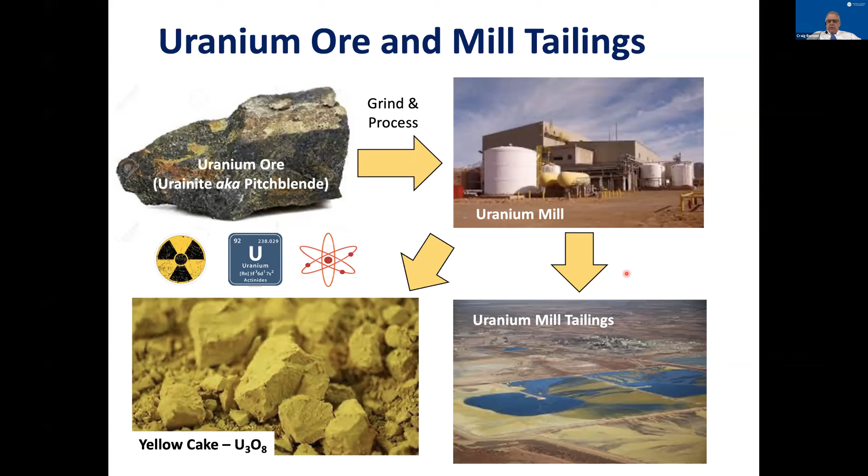So the concern about the environment at the time, particularly when uranium production was beginning in the 50s and 60s in the United States, we had essentially large disposal units for mill tailings, which were unlined and exposed to the atmosphere, uncontrolled waste disposal sites. Today, we wouldn't be doing that, but that's what we did historically. And I don't criticize anybody for that behavior during the time. We just didn't know that this was something we needed to manage more carefully.

In 1978, US Congress passed the Uranium Mill Tailings Radiation Control Act because we had discovered that we had created many of these disposal facilities which were uncontained, and they were having impacts on groundwater and on the atmosphere. So we were getting both air pollution and groundwater pollution. And UMTRCA, really a formative bill, has a whole series of requirements in it, but it required that we limit radon flux to the atmosphere. And we'll talk about what radon is, and we'll talk about what radon fluxes are.

It limits water percolation of the waste, so gas out, water in, and limits groundwater contamination. We're doing that primarily by limiting water percolation in. Importantly, we needed to design these facilities to function for at least 1,000 years, and after the first 100 years, have to function effectively with no maintenance. So that's a really challenging design goal for any engineering system, including uranium mill tailings. You can imagine the effort that has to go into demonstrating that actually we can meet that requirement.

But we're going to focus mainly on the cover. We've got a disposal facility full of uranium mill tailings that has a flux to groundwater, which we want to minimize, and a flux to the atmosphere of radon that we want to minimize as well, and water percolation in from the atmosphere that we want to control or minimize as well. So we're going to look at these two primary elements at the top, water percolation in and radon flux out, and how we do that with a cover over the uranium mill tailings.

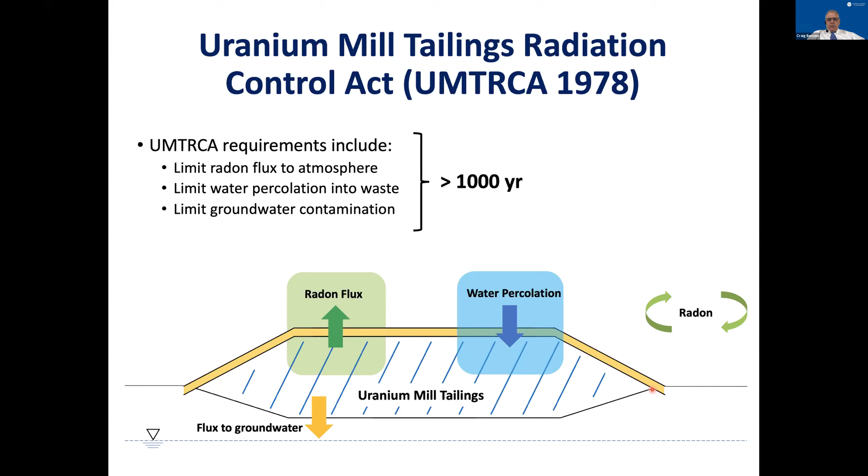Well, let's talk a little bit about uranium and radon, just to put that in perspective, because I realize not everyone is familiar. Uranium itself is a mildly radioactive element. It is the core element that we mine for energy production. But itself, it's mildly radioactive. It decays very, very slowly. It's got a half-life of 4.5 billion years. So if we've got uranium mill tailings in a disposal facility, and we still have uranium in that mill tailings, that uranium will be present for 4.5 billion years at a minimum, right? Actually quite a bit longer, because the half-life is just 4.5 billion.

But it degrades into other elements, and that degradation process has been going on for millennia. And as we step down through the decay chain, we get different radionuclides, some of which are more radioactive and have shorter half-lives. One in particular is radium. That's highly radioactive, and its daughter product is radon-222. And radium has a half-life of 1,600 years, long, but very short compared to uranium. Radon, on the other hand, has an extremely short half-life, 3.8 days. It's a short-lived element, but it's also highly radioactive.

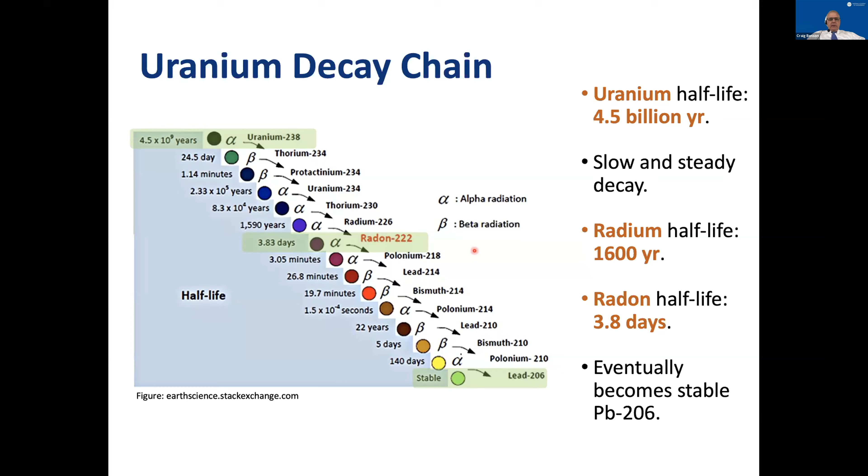This is what one of these facilities looks like. These are enormous facilities. This is one in Bluewater, New Mexico, near the Bluewater uranium mill. There's several disposal facilities at this site. We're going to talk about some data from this site in a bit. And the upper part of this figure is one of these facilities. It's 140 hectares. That's an enormous facility. And you can see at this particular site, it's covered with a rock armor cover. And it stands out in all its surroundings. One of the things we think of with cover design today is trying to design things that are congruent with nature.

When you look at this photograph, you should notice immediately that this cover is distinctly different from the entire rest of the surroundings. So it's actually incongruent, and it will likely change significantly over time. That cover system that's over all these different elements are all a little different here. There's one here in the lower right, I've got this one in the upper middle, and then there's another one over here. We'll talk about that as well.

All of these have a cover profile on it that looks something similar to what we see right here. It's a multi-layer cover. We've got the tailings at the bottom. And on top of the tailings, typically what's not shown here, we'll have a subgrade layer that's just a foundation to be able to build the rest of the cover. But then we'll have a low permeability radon barrier. That's what they're commonly called in the literature.

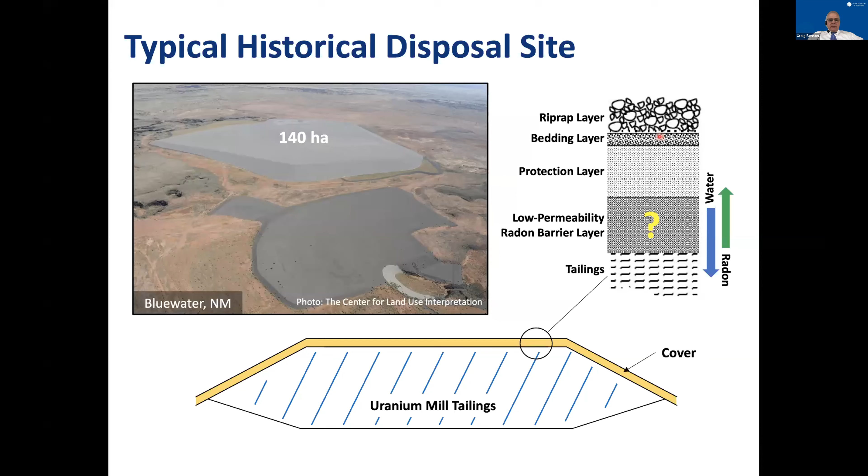The riprap layer was largely designed because erosion was considered the most destructive mechanism over the long term. We needed to manage erosion. The riprap layer itself had other unintended consequences. We'll see some of that. Now, how do these work? Well, I think a lot of us know about hydraulic conductivity. We don't all know about gas diffusion, but the factors that allow us to create low hydraulic conductivity also allow us to create low gas diffusivity, as we'll talk about in this slide.

What I show here on this slide is a radon barrier here in the lower right-hand corner, and then looking at one small piece of it in this blow up right here. If we zoomed in, we would see that that section of the barrier has solids. It has pores between the solids, and some of those pores are filled with gas, some are filled with water. And for radon to make its way through that system, it needs to migrate through these pores, either through the water or through the air-filled components, up from the base and then up to the top.

That transport process is governed by Fick's law, which we show up here. And the key operative parameter is the diffusion coefficient, D, the gas diffusivity. The concentration gradient is essentially controlled. It's zero or near zero in the atmosphere. And down below in the tailings, it is whatever that particular tailings is emitting.

Now, if we want to create a highly effective radon barrier, what we want to do is fill the pores with water, because the radon diffusion coefficient in water is about 10 to the minus 9 square meters per second, whereas in the gas phase or air, it's about 10 to the minus 5. So if I can fill those pores with water, I can create very restrictive pathways for gas diffusion. We do that by placing the barrier at high water contents, wet of the line of optimums, and compacting it so that we have small pores.

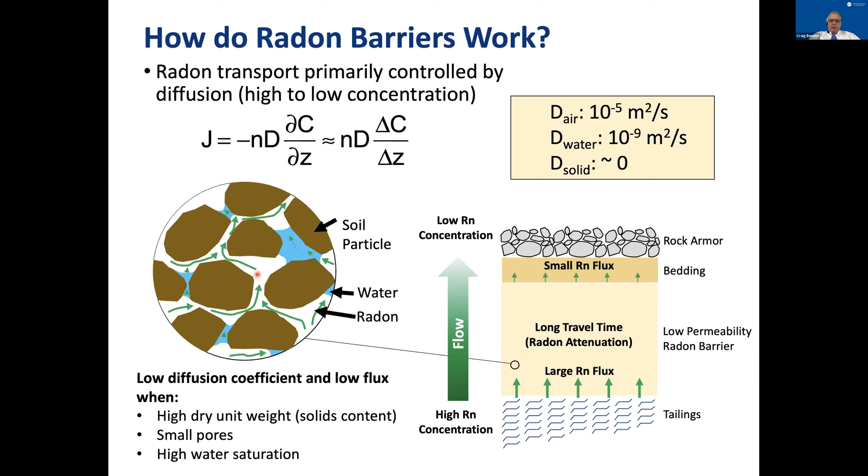So we'll have high dry unit weight, we'll compact it wet of the line of optimums, we'll get small pores, we'll get high water saturation. And in essence, we'll create very fine pores. We'll fill those pores with water, and fine pores tend to want to hold water and create a very low diffusion coefficient, and therefore a low diffusive flux. Those same ideas, as we know, work for hydraulic conductivity as well.

And we can get that same effect by increasing the dry unit weight with a higher compactive effort. We can essentially just crush the pores, eliminate them by crushing the clods and eliminating the interclod pores.

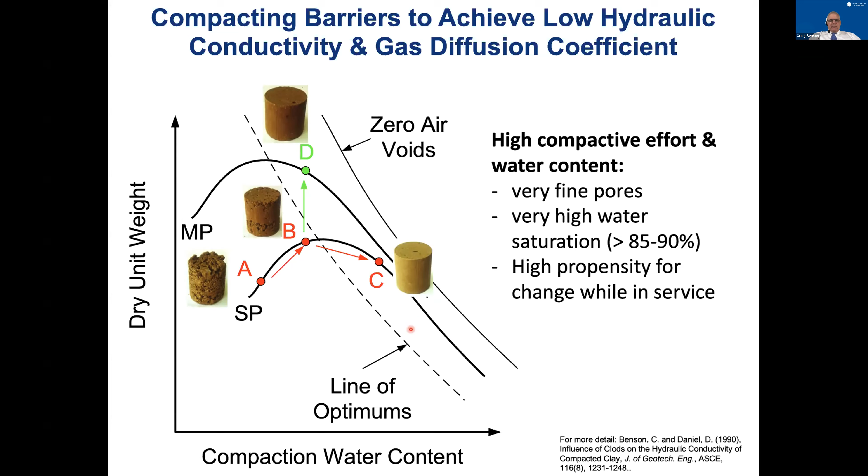That material that we create wet of the line of optimums is also highly vulnerable. It's wet, it tends to be softer, it tends to have very fine pores, and it tends to be very different from what is commonly found in nature. And so we're building a barrier that has engineering properties that are designed to meet certain goals, but it also has a challenge because it's vulnerable, because its state is not a natural state. And over time, nature will alter that barrier, as we'll see as we go through this presentation. And the challenge really is understanding how things evolve from the as-built condition to 1,000 years or so.

We've been fortunate. We did studies early on with US DOE and Nuclear Regulatory Commission and EPA through the Alternative Cover Assessment Program, where we were studying the behavior of these systems 5 to 6 years out. This project we have today gets into the 20 to 30 years out period, giving a picture of where things might go out to the very long term at 1,000 years.

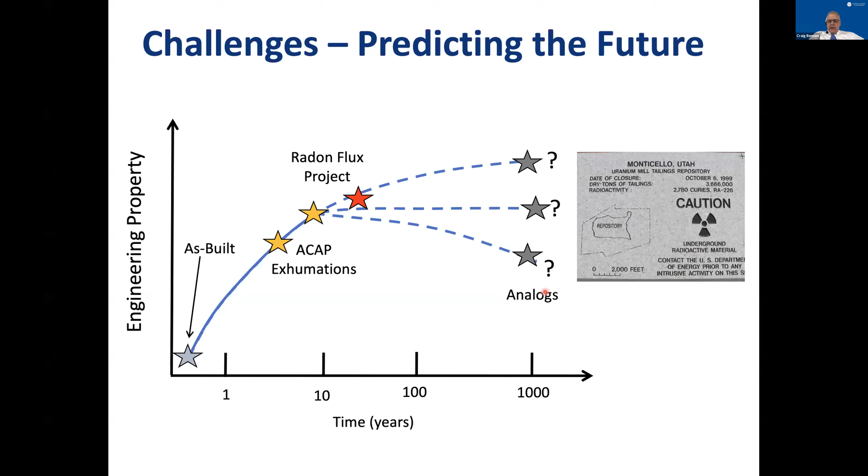One of the things that we use to look at this 1,000-year horizon is what we call a natural analog. I've been talking about how systems tend to evolve to a natural state. We often try to find a natural profile in the Earth's surface that mimics what we're building and is in the same environment. So we can study what it will look like in the very long term using that natural analog. And we'll see some of that as we go through today.

So how will these systems change over centuries? Will the water percolation remain low? Will the radon flux be controlled? Do we have any information on that? It's interesting, until this study, we had no information about the long-term effectiveness in terms of radon flux. We do know from past studies, the ACAP study where we looked at covers that were 5 to 6 years out, that pedogenesis or soil structure forming processes alter engineered barriers to a significant degree. We know that occurs. Pedogenesis is inevitable in cover systems because they're near the surface, they're exposed, they're close to the atmosphere, they've got plant interactions, the natural system is in close proximity, wanting to alter them.

Do we see those same type of issues, pedogenic change, causing changes in the diffusion coefficients and diffusive fluxes? When we look at these longer term facilities that have been in operation for decades, are we seeing the same changes that some of our other studies illustrated, changes in hydraulic properties? And then a question that we asked later on, as we were getting through the studies, is can we actually design barriers that are more resilient and fit into a natural system more readily, using a natural type of design approach?

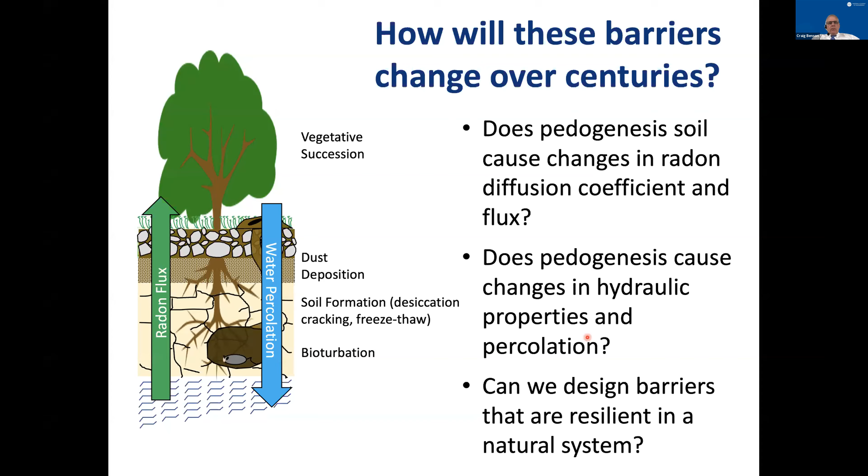Well, we do know from some of our early work that these type of changes do occur in engineered barriers at uranium mill tailings disposal facilities. We were fortunate about 20 years ago, around 2000, to build a very large scale test facility at the Monticello Uranium Mill Tailings Disposal Facility in Monticello, Utah. It's in southern Utah, at a high elevation, about 8,000 feet. So it's both a desert environment and also a mountainous environment at the same time.

When we were building the Monticello experiments, we had the opportunity to decommission some early experiments that were conducted at that site about a decade earlier. And that's what I'm going to show you in this slide. There were caisson experiments done at the Monticello facility where they built cover profiles within essentially a large metal caisson, with several different variations to evaluate their hydrology. And when we were building our test facility at Monticello, we decommissioned these caisson lysimeters. And this is Bill Albright on the left here, Bill's from DRI, and Eric MacDonald, who helped with this particular part of the study. He's a geomorphologist at DRI.

But you can look through the cover system that was being evaluated early on at Monticello. We've got a surface layer, a fine textured material going down for water storage. We've got a biota barrier here that's essentially cobble with an infill of fine textured material. And way down at the bottom, you can't see very well, is the radon barrier, right down here at the very bottom.

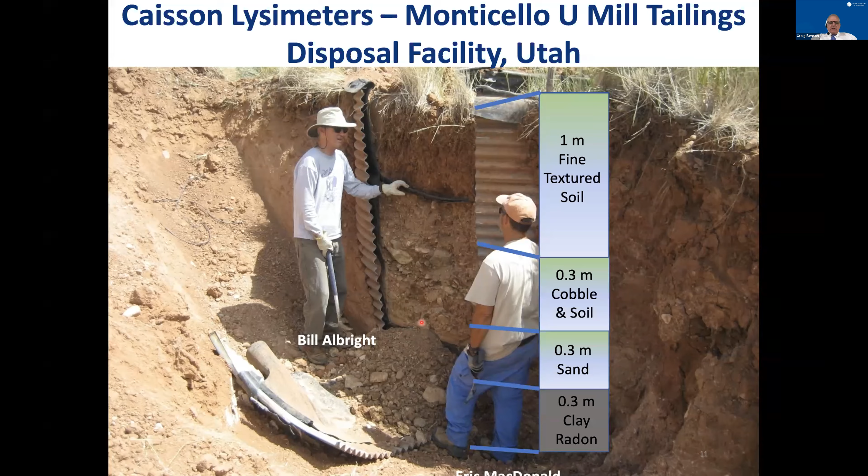Well, we examined all these different components out of these caisson lysimeters. And one of the things that we did is examine the simulated radon barrier that was built at great depths, 2 meters deep. That radon barrier is put in, like we talked about, wet of the line of optimums, heavily compacted to have high water saturation and very fine pores. What did we see? This is the radon barrier, all right?

We see two things that are evident. One, clearly we see cracks, right? These cracks weren't from us disassembling the lysimeter. You can tell they've been there for some time. The other thing that we see is that there are roots within those cracks. Why are those roots there?

Well, this is in a semi-arid environment where the vegetation has evolved to scavenge water. It will seek out and extract water that is available even at depth, 2 meters deep here. So the roots penetrate down through the profile. They find this wet, moist radon barrier. They embed in that barrier and they extract the water out to help to support transpiration.

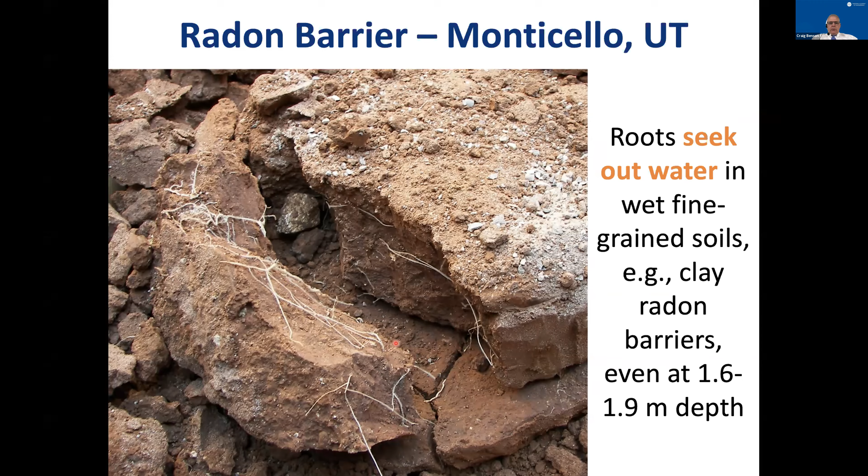At the same time, as they're extracting the water, pore pressures are getting negative, suctions are increasing, and the soil shrinks and it cracks. And those cracks then become pathways for water flow, which then become additional sources for root water uptake in the future. So we know these are very real phenomena.

All of the in-service hydraulic conductivities are much, much higher than the as-built condition, at least 10 times and more like 100 times higher and sometimes 1,000 times higher. In fact, what nature does is alter that highly engineered barrier and puts it in a state that's conducive to the natural system.

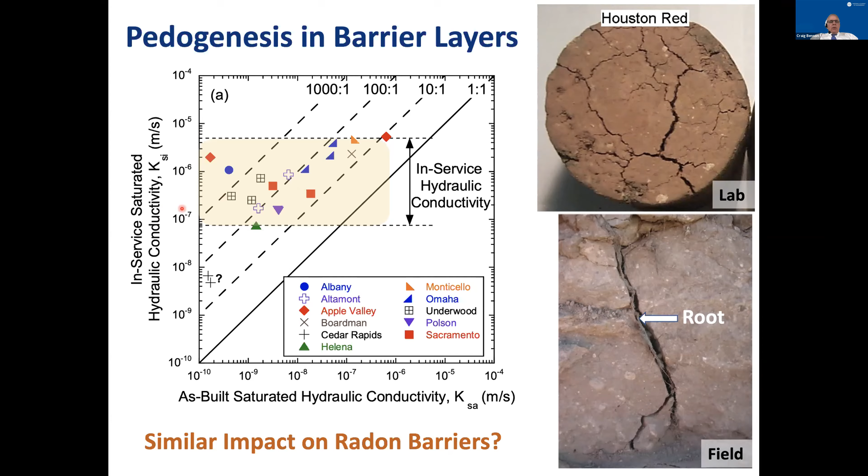The other thing that we see is the unsaturated hydraulic properties change as well. In these systems, both the saturated properties and the unsaturated hydraulic properties are altered, and they both influence the hydrology. For our percolation rate we focus primarily on saturated conductivity, but the unsaturated hydraulic properties are just as important for controlling water percolation in.

And we know that as larger pores develop in the barrier system, we tend to have a soil water characteristic curve that's representative of a narrow distribution of fine pores evolve into a soil water characteristic curve that is representative of a much broader distribution of pores with a series of large pores grading all the way to finer pores. So we see an evolution in the soil water characteristic curve as well.

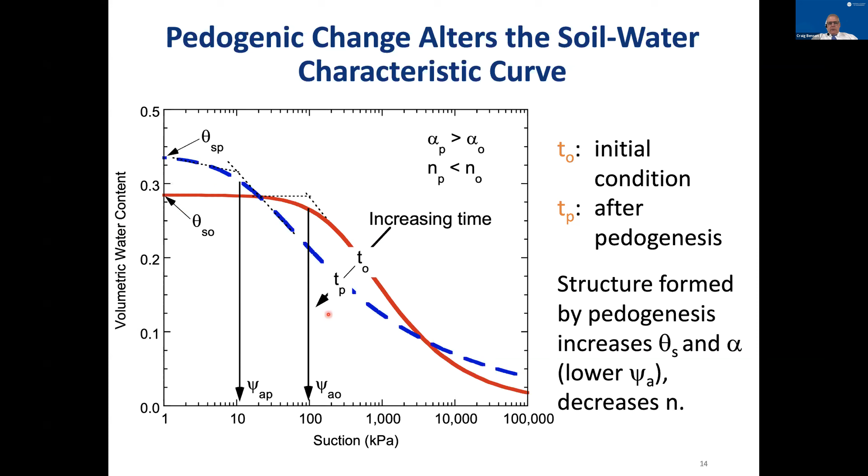Our early work on this was all documented in a NUREG report. This is a really broadly used guidance document for engineering properties to use in performance assessments for low-level waste facilities and mill tailings disposal facilities. But a lot of that was documented back in 2011, and that report has been used extensively.

But one of the issues with that report, and the data that I've showed you so far, is our early work was done on cover systems that had been in either test facilities or at full-scale covers, but they had been in service 5 or 6 years, relatively young compared to the timelines we're looking at. Of course, none of these facilities are anywhere near the hundreds of years or thousands of years type of performance that is ultimately of interest.

But one of the criticisms of that work is it didn't reflect the long term. And many of the data sets that I just showed you were from facilities that were built as test facilities, not full-scale operating facilities. And that's what gave birth to our radon study that we finished most recently.

One question was, do we see similar types of alterations that we saw in hydraulic properties at full-scale facilities? And if we see alterations in hydraulic properties, should we see alterations in gaseous diffusion as well? The diffusion properties should be altered as well. Is the diffusivity going to be altered in the same way the hydraulic properties are? And so we went to answer both of those questions.

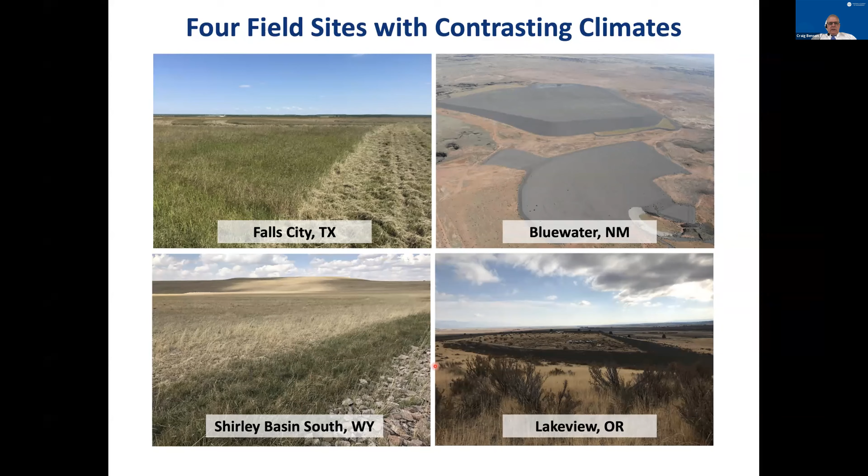So 4 different facilities, different surface textures on the covers, as you can see here, different climates. We went to each of these sites and exhumed the covers in a series of test pits and examined both the hydraulic properties and radon diffusion as well.

So goals of our work were, 1, to make radon flux measurements and to evaluate whether we were seeing radon fluxes that were different from what we measured in the as-built condition, to collect samples that we'd be able to document, if there were alterations, why they were occurring. We also collected samples to look at hydraulic properties throughout the depth of the profile to evaluate whether we're seeing change in hydraulic properties.

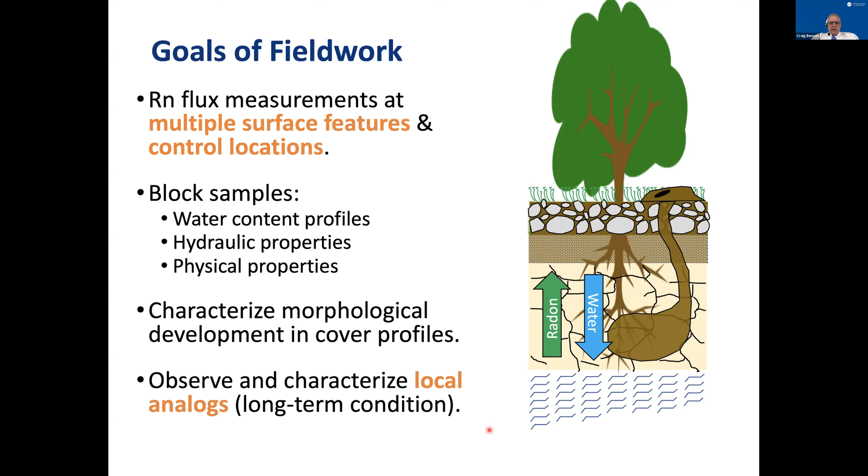We did morphological studies to relate the changes in engineering properties to changes in structure in a quantitative way. And then perhaps equally important, if not more important, is that at each site, we found a natural analog. We found a similar profile in the Earth's surface that mimicked what was at our disposal facility, but had been in place for millennia. And we examined those analogs in much the same way we did the actual facilities to determine whether we were seeing similar types of alterations in the long term that we were seeing in our facilities.

When we did our work, we used a biased sampling approach. And I think it's important to point that out. We didn't use a random sampling approach. We went out and looked for features where we would see the largest amount of pedogenic driven change.

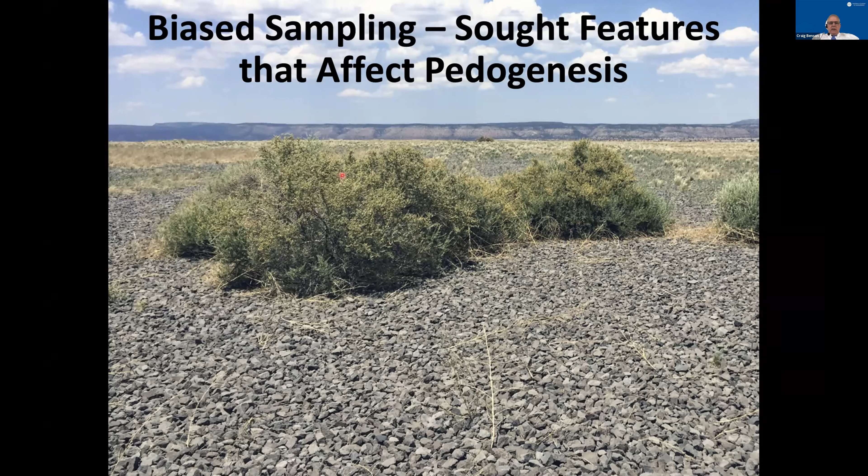For example, this is at Bluewater, New Mexico. We did sampling underneath regions where we had woody vegetation, deep-rooted woody vegetation, as an indicator of what the long-term state would be. This would be accelerated degradation due to the aggressive work of the woody vegetation.

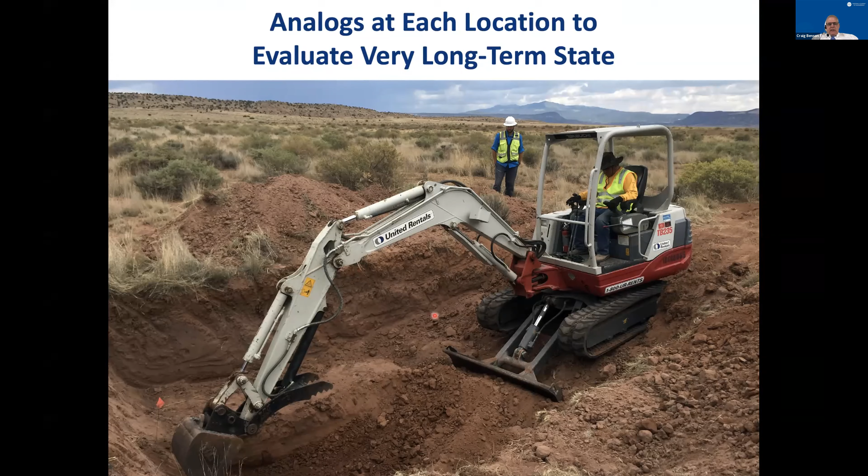To back up just for 1 minute, as I indicated, at each site, we did biased sampling at the tailings facility itself, but we also selected an analog, and we did the same type of work in the natural analog that we did at our uranium mill tailings disposal facility. And this photograph actually is in eastern Wyoming, near the site in that region where we're examining the profile for a natural analog. And we'll come back to that.

So at each one of our tailings disposal facilities, we exhumed test pits in the cover. Showing here with a little mini excavator, we're pulling off the surface layers and exposing the surface of the radon barrier below.

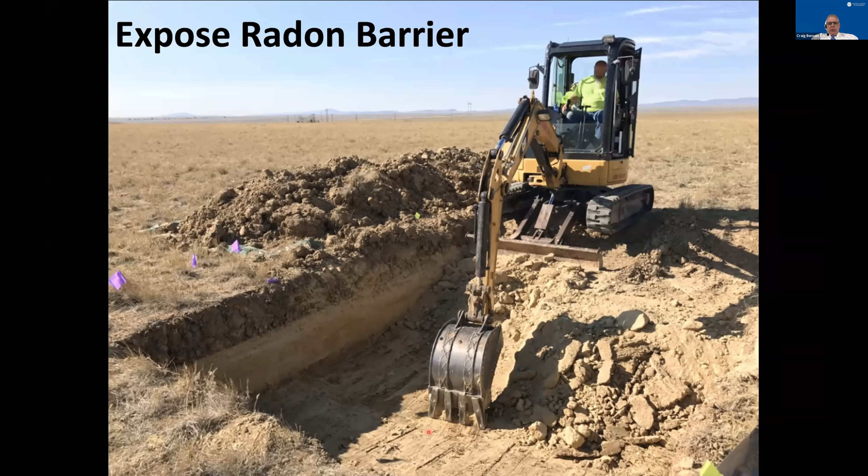On the radon barrier, we put a series of flux chambers on the surface to measure the radon flux. We'd expose the surface of the radon barrier, install a flux chamber on top, and then we would measure what's called a so-called radon buildup. So we essentially put the chamber on top and it's closed, so it's got essentially a no flux boundary condition at the top.

And so the gas flows into that chamber, the concentration builds up, and as it builds up, because the concentration is increasing, the flux is actually slowing down. And we can use an analytical solution to evaluate the radon flux and the diffusivity from that so-called radon buildup curve, which I'll show you in a minute.

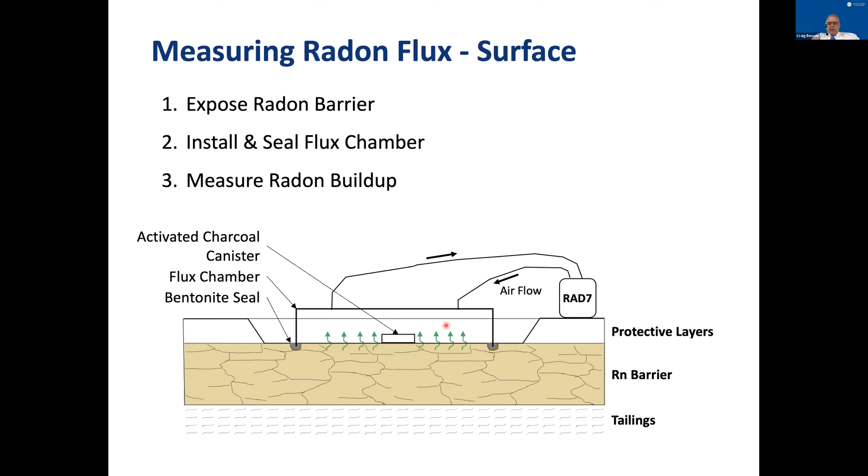We measured the radon concentrations in our flux chamber with an activated charcoal canister. That gave us a point measurement. But we did most of our work with an electronic radon detector, which is essentially just an alpha detector where we just pump gas out of the chamber through the radon detector and then back into the chamber, circulating it through and measuring the radon concentrations.

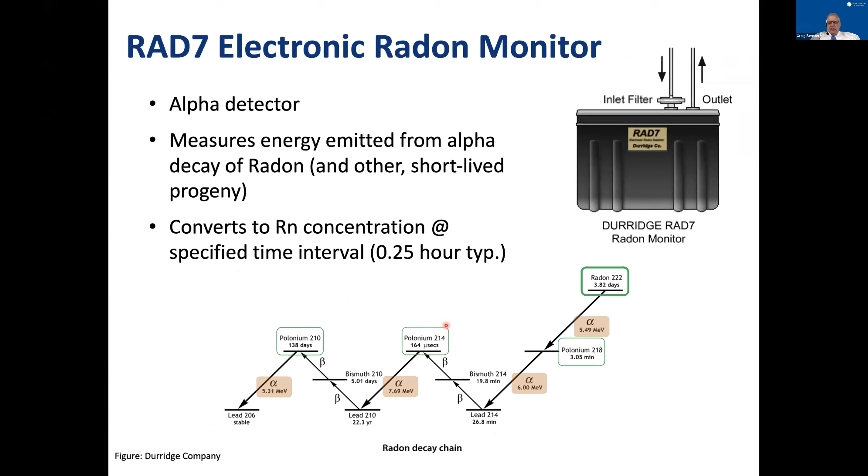The RAD7, as I mentioned, is an alpha detector, and it just measures alpha decay of radon. So it's looking at alpha emissions, and then we can convert that to radon concentrations very specifically using the decay series. And we use these Durridge RAD7 radon monitors.

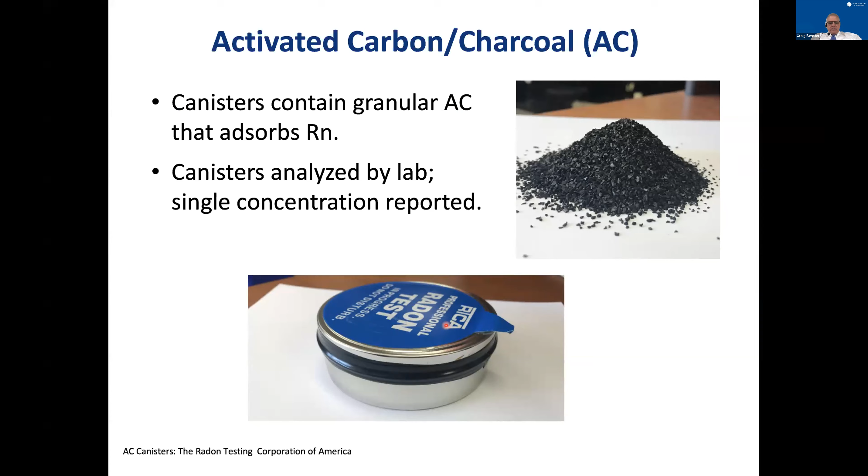This is an example of an activated carbon, not much different than what you might use in your basement. These were put into our chambers throughout our testing process, then sealed back up, sent to a lab and tested for us. This was done by Radon Testing Corporation of America.

We did different size chambers to evaluate scale effects, thinking that if we had roots in our system and structural development that was occurring, we should see scale effects in the diffusive flux, just like we might see in the hydraulic properties. We know hydraulic properties are highly scale dependent. We might expect the same thing to be true for diffusion.

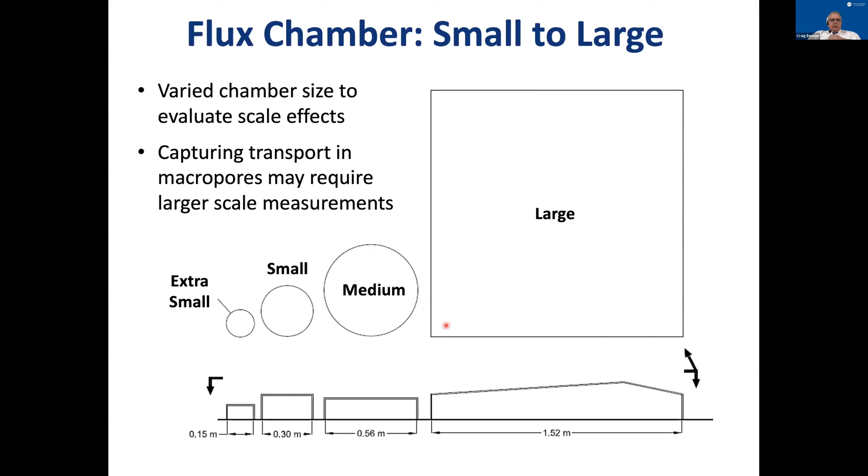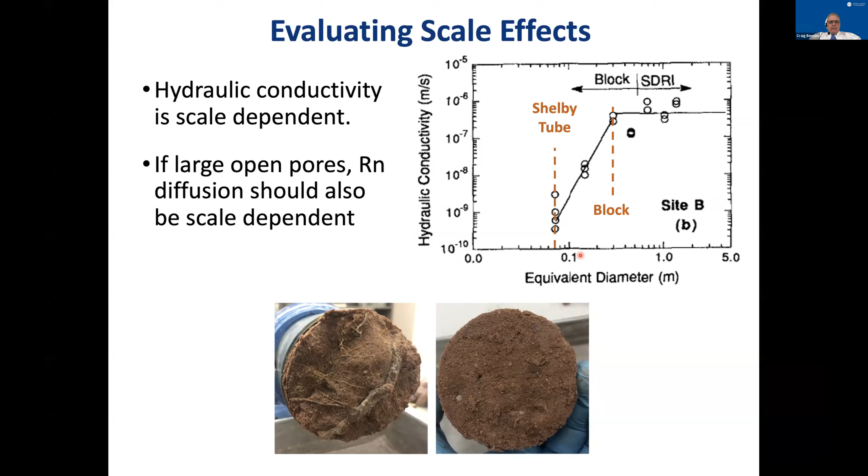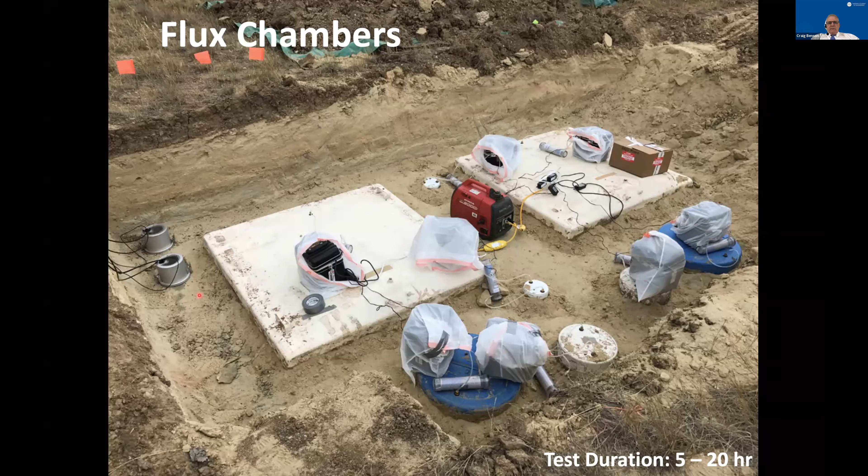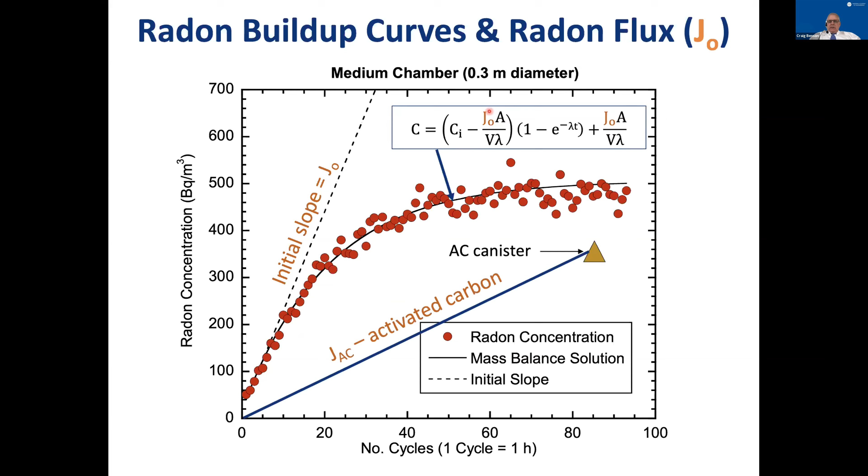We did activated carbon measurements as well. I'm not going to talk about those so much. We're going to focus primarily on the electronic radon detector data. At the same time, we collected block samples.

We did our sampling at the top first for radon flux with the radon flux chambers I just mentioned. Then we excavated down through the radon barrier, collecting large block samples for hydraulic properties testing back in the laboratory. So this is a block sample being exhumed, packed up in a protective ring, and shipped back to the laboratory.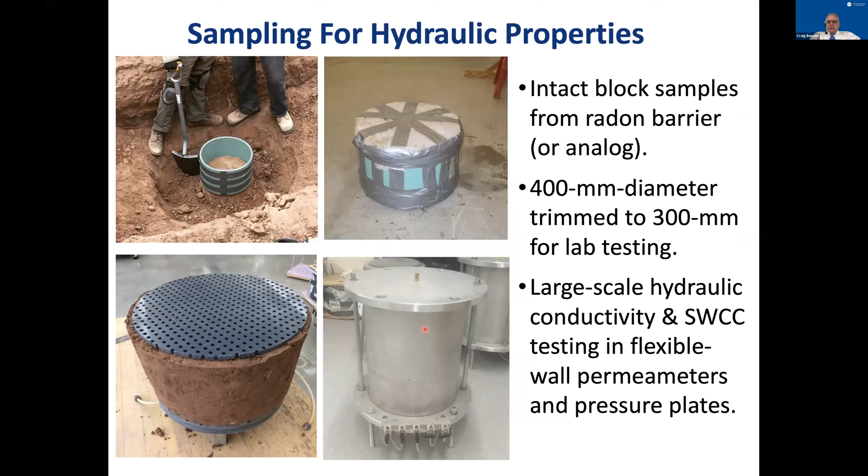Then here's one being trimmed back in the lab to a 300 millimeter diameter sample, and it's run in a large scale permeameter or a large scale pressure plate for unsaturated hydraulic properties.

The other thing that we did as we went down through the profile is soil morphological surveys. This is Morgan Williams, who, as I mentioned, is a soil scientist and a pedologist, and he did the soil morphological surveys. We'll talk just a little bit about that at the very end.

And then at the very bottom, as we got through the radon barrier, we measured the surface flux off the existing tailings. So we were measuring emissions off the surface, the radon flux off the surface of the barrier, but also measuring the radon flux off the tailings below. So we had an ability to evaluate the efficacy of the barrier as well by comparing those two measurements.

Let's look at some data. We'll talk about hydraulic properties first, then we'll talk about radon diffusion coefficients. I indicated we did an early study for the Nuclear Regulatory Commission, EPA and DOE that created a guidance document, which I showed you. And that guidance document had recommended ranges of hydraulic properties to use in so-called performance assessments for uranium mill tailings disposal facilities and low-level waste disposal facilities.

Those recommendations had lower bounds and upper bounds on saturated hydraulic conductivity, which I illustrate here on these graphs. These are saturated conductivity plotted as a function of depth below ground surface. And in our guidance documents early on, we had a recommendation that for long-term conditions, an engineered fine textured soil barrier should be assumed to have a saturated conductivity between 10 to the minus 7 and about 5 times 10 to the minus 6 meters per second. That's quite a bit higher than what we install them in, but that's how pedogenesis alters the property.

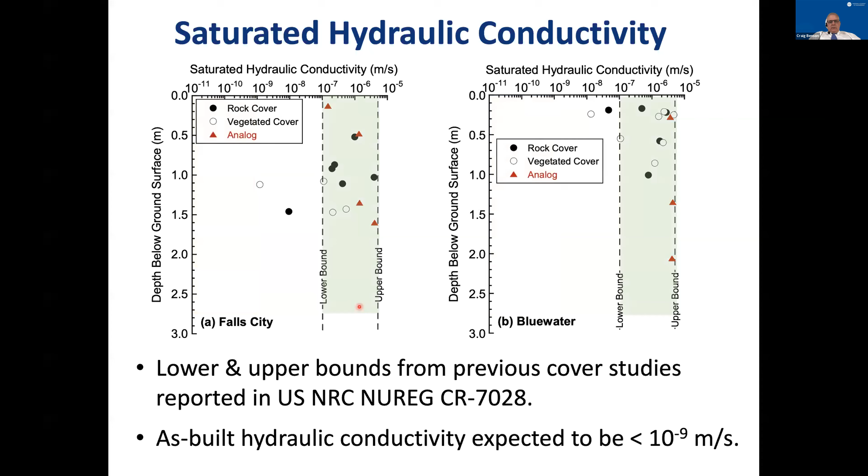So the original recommendations in NUREG/CR-7028 for hydraulic properties seem to be valid for most sites. This is Falls City and Bluewater, these two sites, and we'll go and take a look at the other two. The Lakeview, Oregon site, which I mentioned a few slides back, similar type of data, quite a bit different from the original condition shown here on the left, but falling within the lower and upper bounds very clearly, and the analog falling within those bounds as well. The analog, you'll probably notice on two of the sites so far, has been pretty close to the upper bound.

The Shirley Basin site was a little different. This is in Wyoming. And at this site, the hydraulic conductivity had not evolved nearly as much. It was orders of magnitude below these lower and upper bounds. The data fall at least a factor of 10, and in some cases, several orders of magnitude below. We had one right up in the range. And the analog at this site as well was quite a bit lower.

And this is a very unique site built in the bentonite range in the United States. And that cover, the radon barrier, is effectively built out of bentonite. The entire barrier built out of bentonite, exhumed from a local bentonite source. And so it is different than the rest of the cover systems. And we might expect that Shirley Basin cover may be less permeable.

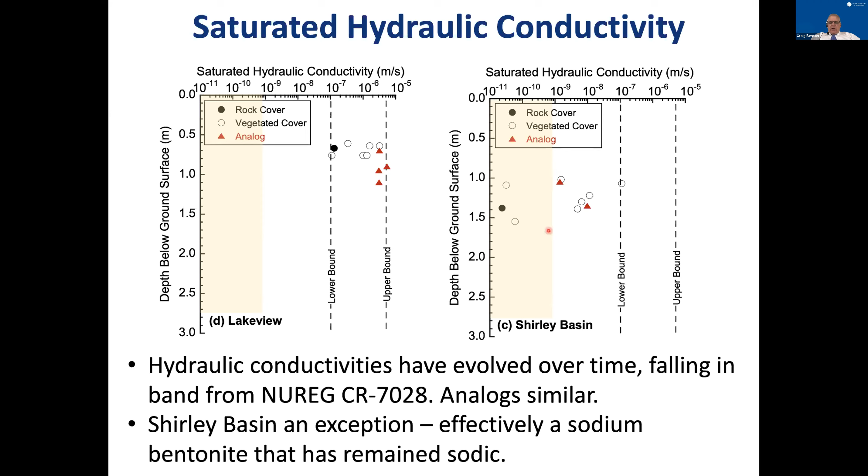It is a unique type of material and a unique environment. We looked at hydraulic properties as well. As I mentioned, we're focused on the next slide. We'll talk about the alpha parameter that talks about where the break in the curve occurs, and the N parameter, which defines the slope. Fine textured soils that have been compacted wet of the line of optimums tend to have a very narrow range of very fine pores. They'll have very low alpha and higher N to represent that pore state.

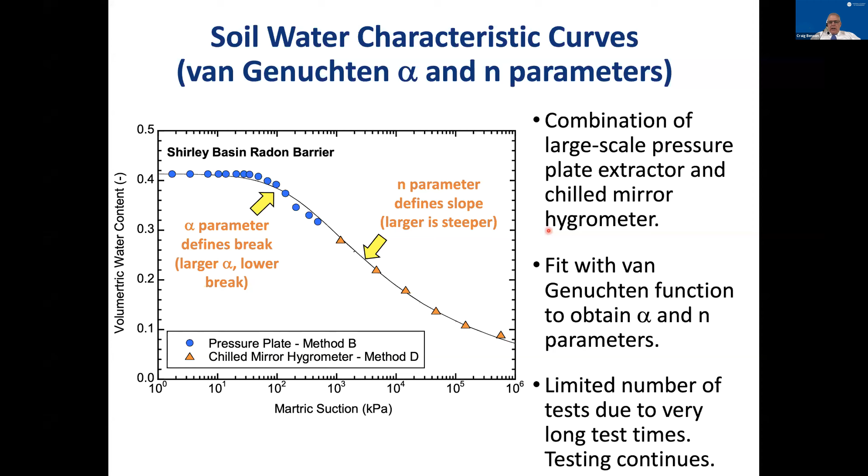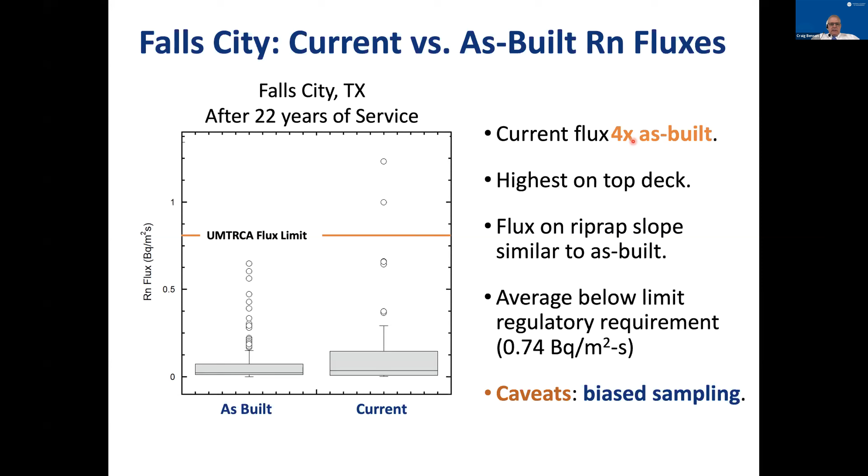I want to just caveat again that this was bias sampling. And so while it's a little bit higher, and as I report here, 4 times higher on average than the as-built condition, our sampling was biased. And the average in-service flux is probably actually lower. The key thing is still meeting the goals and not much different than historically.

That was very positive. While this site experienced much greater change, it was still meeting the goals for radon emission control. And also noting earlier, I talked about how similar our analog properties were with our field measurements for hydraulic properties. We can probably make that inference for diffusive properties as well.

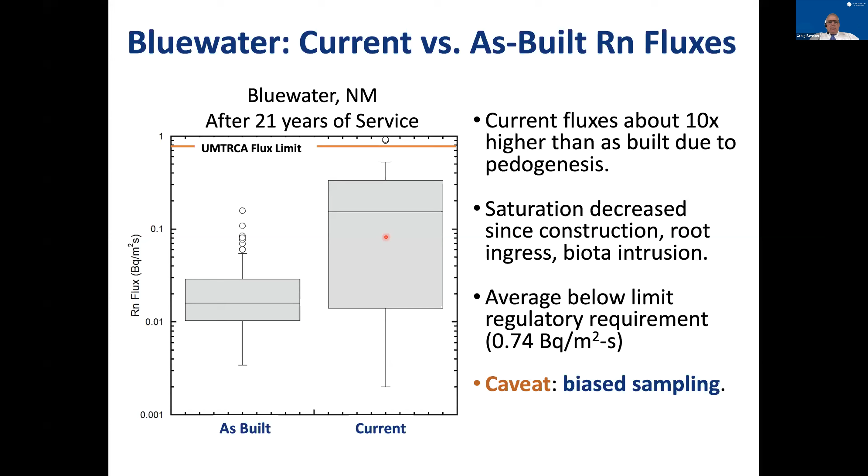In this site, really no change at all in the radon emission rate or the radon diffusivity. That's consistent with the hydraulic properties. Remember, at this site, the hydraulic properties had not been altered much either because it was built out of essentially a natural bentonite material.

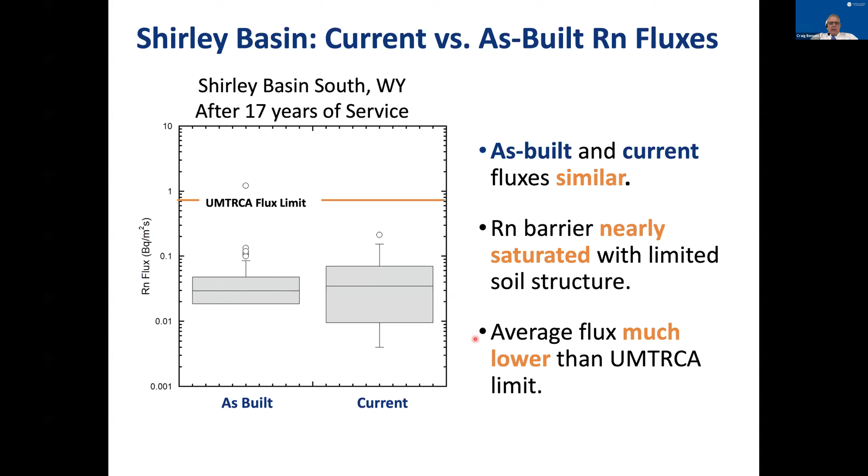So what you've seen in each of these cases is that while there were, in some cases, no change in radon flux, in some cases, a modest change in radon flux, all of them still met the flux criterion, even in the case where we had a much larger one, a factor of 10 increase.

We looked at other factors as well. So while that was all positive, we still want to understand what was affecting radon fluxes. And we looked at some of the things that we might be concerned about. So for example, we looked at scale effects, as I mentioned early on. And this graph is a little bit busy, but I want to talk you through it just a little bit. We're going to look at a couple other things in here as well. We're going to use this graph again.

The purple symbols here are the flux measurements made directly on top of the tailings. So that's the waste, all right? Those are the highest fluxes. So one thing you see, regardless of scale, is that our measurements made on top of the barrier, which are all other points, green, blue, red, and orange with different size flux chambers, all those are below the flux emitted from the waste. So this barrier is effective in reducing the radon emission.

It reduces the flux, comparing the data, and I realize this is busy, but a factor of 10 or higher relative to what would have occurred from naturally exposed, or let's say uncovered, uranium mill tailings. The other thing that we see here, if we look at this very carefully, is that there's no distinct scale effect. So for example, if there's a scale effect, we might consistently expect the larger chambers to give us larger fluxes because they would capture more large scale features.

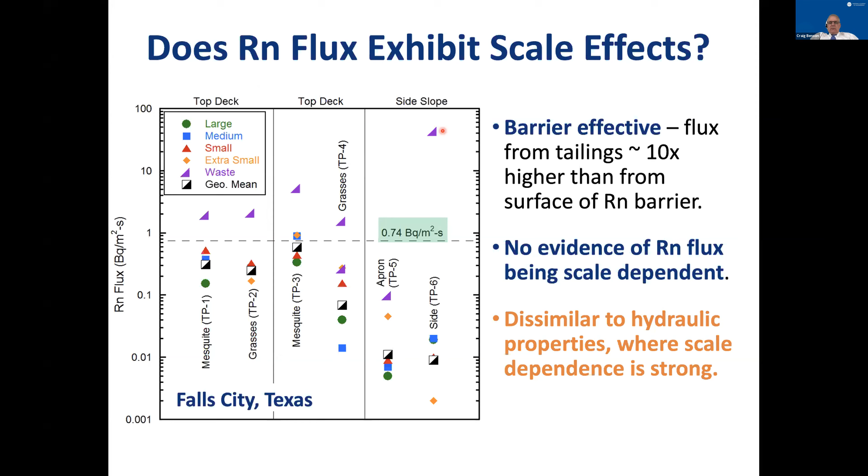This surprised us, but was also very positive. That allowed us actually to commingle those data and analyze them in bulk. But there's no evidence of radon flux being scale dependent. We wanted to look too, did we see the specific impacts of factors like deep-rooted woody vegetation? So we picked sites, like I mentioned, like under a rabbit brush, where we would see deep rooted woody root structures down through the profile. You can see them all the way down through the radon barrier. We measured fluxes directly on top of those and went back and examined these profiles later on.

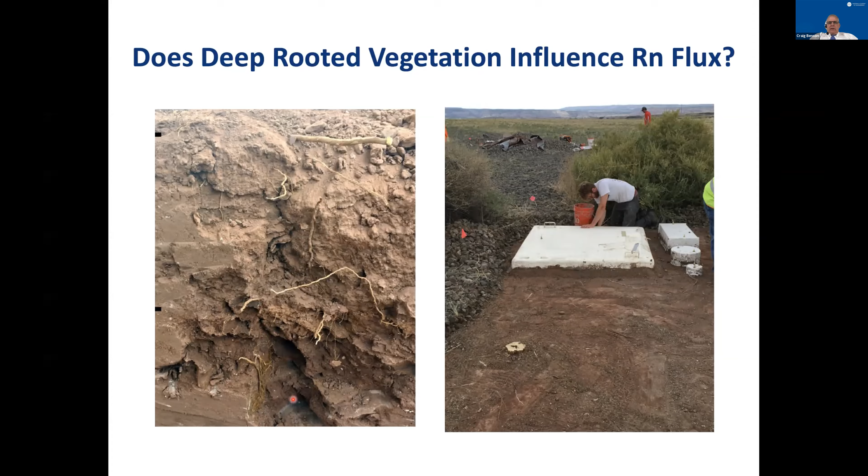This example here at the Bluewater site, we're going to go to one part of that site here, the MTP upper cell, and we're going to compare data from two different test pits. These were two test pits that were in close proximity in the same test area. One was sparse vegetation used as a control, and then one directly beneath the salt bush, which had deep woody features associated with it. What we see is that the fluxes in the sparsely vegetated area are quite a bit lower relative to the fluxes underneath the salt bush. Probably 2 orders of magnitude lower.

Why is that? Well, one, the salt bush, as it penetrates down through the profile, creates structure. And two, as we talked about early on with that example from Monticello, with the roots going down into the radon barrier, that plant is extracting water. And one of the things that we see is that if we look at water content profiles, underneath the salt bush, the water content is significantly lower relative to the sparsely vegetated area. That's shown here in this graph at the right. The solid symbols, sparsely vegetated, the open symbols for salt bush. So the roots are drying it out.

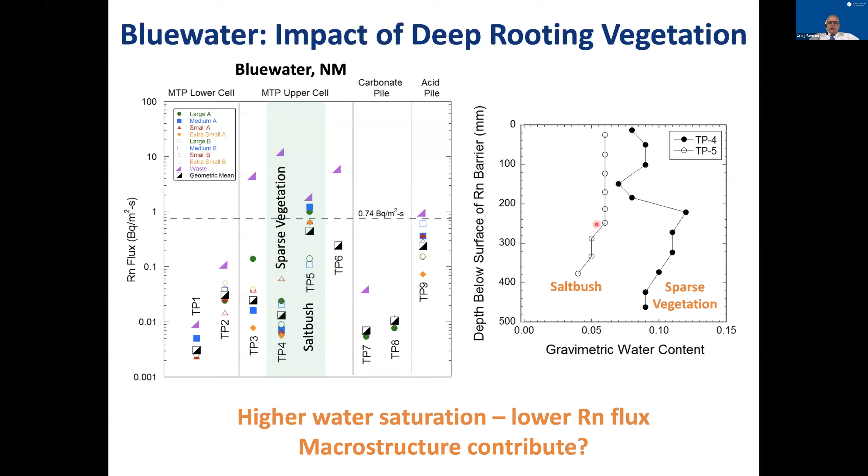And what do we remember about diffusivity? Well, the water phase diffusivity is orders of magnitude lower than the gas phase. If we're removing the water, that means we have more gas-filled pores, higher diffusion coefficient. And so we saw very clearly that, one, we got structure, but we also got changes in diffusive flux and diffusion coefficients, largely due to lower water contents from root water uptake.

The converse of that, at the Bluewater site, in one of the cells, because it's built on tailings, and tailings are soft, compressible materials, one of those cells settled more in the middle because it was deeper. And it actually created a pond, a seasonal pond on top of the tailings facility. And so it would actually be covered with water in the spring season each year during snowmelt.

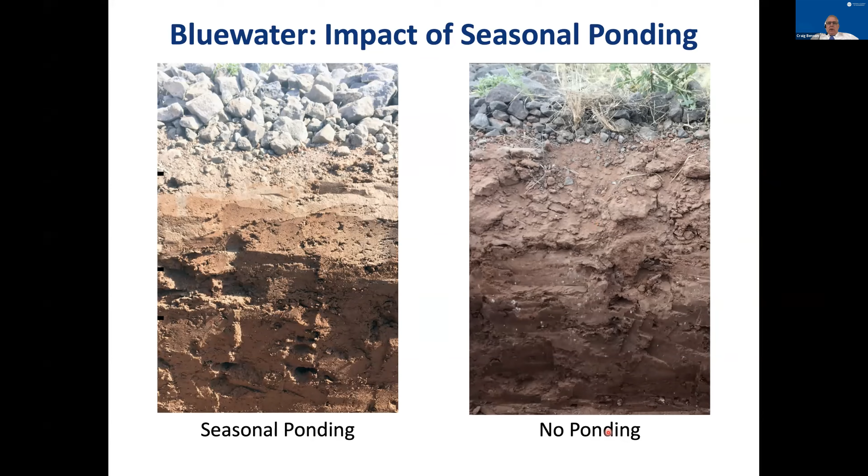And so in this case, we might expect, in the areas of that facility that have been underneath the ponded condition, they're probably wetter and they probably have lower fluxes. So the converse to that. When we went and looked at that, at the MTP lower cell at the Bluewater facility, TP1 here being test pit 1 with fluxes that were in an area that was covered with water, and TP2, same part of that cell, but outside the ponded area, we can see the fluxes are an order of magnitude higher. And that change at that site, again, largely due to water saturation.

As I show here on the right, the filled symbols for TP1 and the open symbols for TP2. Wetter conditions, more water-filled pores, lower diffusion coefficient in the liquid phase, lower gas diffusivity overall, a factor of 10 lower. At this site, both of those were very low and well below the 0.74 becquerel per meter square second standard. So they both were satisfactory, but still the phenomenon is true. Conditions that promote higher water saturation give us lower radon flux.

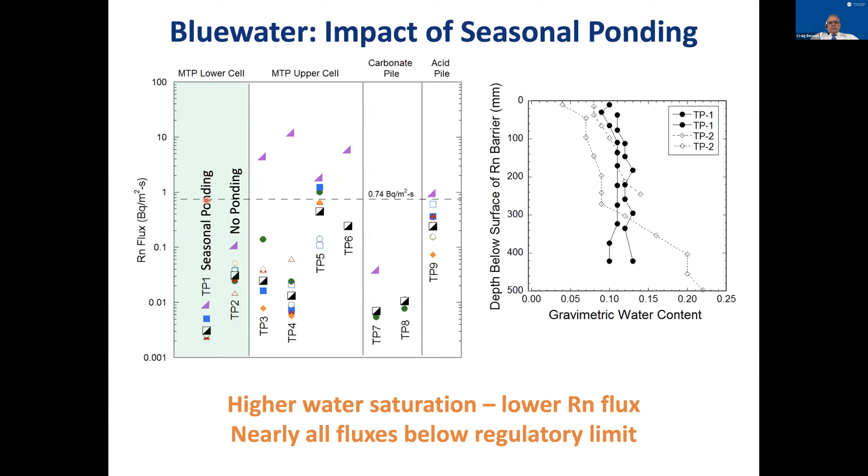One other example, do we see different cover types affecting the radon flux? Do they have similar types of behavior? So for example, this is a riprap covered side slope relative to a grass covered surface at the Falls City facility. The grassy surface on the top deck having vegetation penetrating through, and the rock side slope being nearly devoid of vegetation, a few spots.

And you can imagine that side slope, it's got very large pores. So when precipitation falls on top of it, it's going straight in and down. So very different types of conditions on the side slope versus the top deck. Does that give us a difference? Let's look at some of our data from Falls City. On the side slope, that's where we have the riprap. It's got a riprap surface. It has no vegetation to extend roots downward

and extract water. The diffusion coefficients on the side slope were very, very, very low, the lowest of the entire site. We go on the top deck, in contrast on the left side of my graph, top deck in an area with mesquite bush and grasses, we have much higher fluxes, a couple of orders of magnitude. One, we're getting root penetration, opening up the pores with structural change.

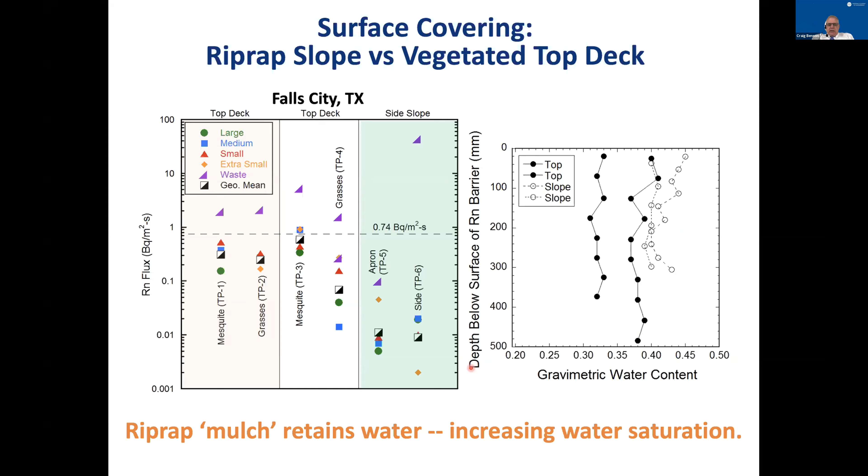One of the things that we've been working on recently is trying to relate these alterations to quantitative measures of soil structure development. This is really an evolving area, so I'm just going to show one brief slide on this, and then we'll wrap up. In each of those test pits I showed early on, we're doing a morphological survey to look at structure, and we can develop a soil morphological development score. It's an integrated measure of the different types of features that are observed in the test pit.

And you can see that we are getting a rough relationship between hydraulic conductivity and this soil morphological development score, with a higher score meaning more development, with the most permeable barrier materials having the greatest amount of morphological development, and the highest radon diffusion coefficients that we measured in the field being associated with areas that had the highest amount of structural development, as indicated by our soil morphological development score. We'll have more on that as it evolves a little bit later, but I thought I would show that to bring this together.

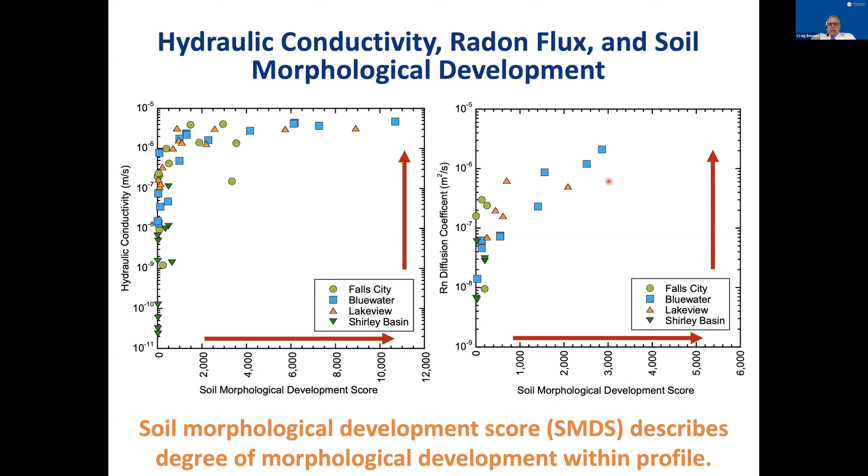So I had a little animation in there, but I'll just push on. So what are some of the practical conclusions? One, well, the hydraulic properties of engineered barriers evolve while in service. We saw this from our early studies. Our full-scale evaluation of operating facilities confirms this.

Structure develops due to pedogenic processes. They're more permeable, they retain less water, they have lower water saturation, largely due to the formation of structure within the profile, larger pores. This occurs not only at the very top surface, but down as deep as 2 meters. That was a question early on too. How deep does this penetration go? Well, we don't know how deep it goes, but we know at least it goes as deep as 2 meters.

Our recommendations from 2011 in NUREG/CR-7028 on hydraulic properties for use in a performance assessment, they're pretty reasonable. Our Shirley Basin site was at the low end and outside the range recommended in this earlier guidance document, but using the recommendations in this guidance document at least would be conservative. So it provides reliable data sets for use in predictions for long-term performance.

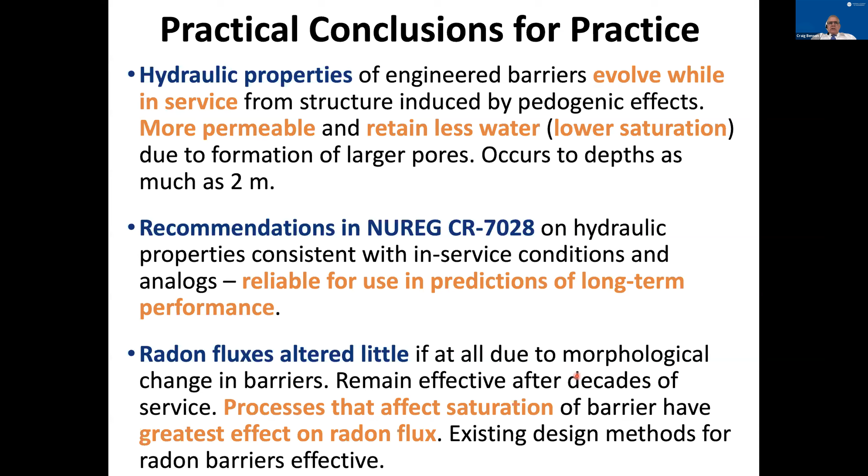Our radon fluxes were not altered nearly as much as we saw from our hydraulic properties. We saw in some cases radon flux had increased by at most a factor of 10, and that was biased sampling. And in most cases, it was much smaller. In one case, no alteration in radon flux at all. And that was governed largely by how much water was retained in the system. The water saturation was the most significant factor affecting the radon flux. Structure is important too, but we saw consistently lower water saturations, higher radon fluxes.

And so if we can do anything in terms of creating a more resilient system, create a system that retains water within that radon barrier to the degree that's possible. That will make it more resilient over time.

I've covered a lot of material in here today. If you're interested in reading more about this, there is a NUREG coming out this fall that describes the 6-year study. This was one gargantuan document with 6 different PIs. You can imagine just trying to put this together, but it will be available later this fall. It's in publication at the Nuclear Regulatory Commission. So if you're interested in that, please look it up. And it is free. You can download it from the ADAMS document retrieval service at the Nuclear Regulatory Commission at nrc.gov.

All right. Krishna, I went a little more than an hour and you told me I could do that. So yeah. No problem. Thanks for covering a lot of details. Amazing research. I think this shows a very comprehensive field evaluation of cover systems for radon. And I hope the audience got a lot of ideas from your research to conduct such field studies in addition to lab or modeling studies in our research projects. So, extremely informative presentation. So do you want to look at the chat box and answer some of the questions?